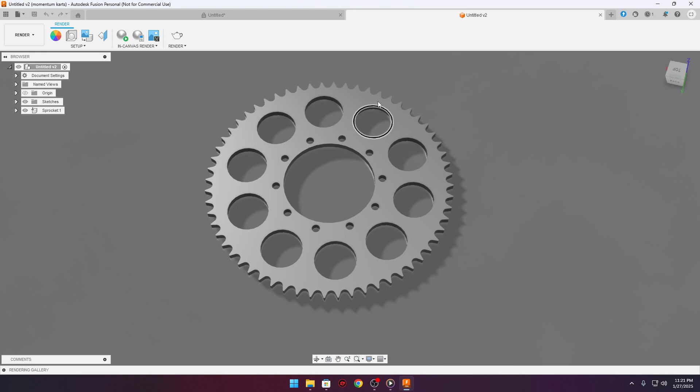What you're gonna need is Fusion 360. You can get this free from their website. And then you're gonna need the Sprocket Master add-on. I'll link this in the description. You can download it.

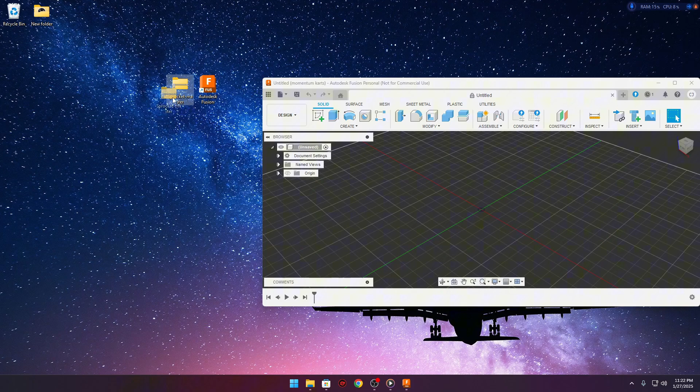You're gonna extract this. Once you extract it, you're gonna come to Fusion 360 and over to Utilities, and then go into Add-ins, Scripts and Add-ins. Then you're gonna push on this little green plus right here. When it opens up, you're gonna go extract that, go into the folder, and then click on the second one. You can see down here, My Scripts, and it shows Sprocket. You're gonna click on that and push Run.

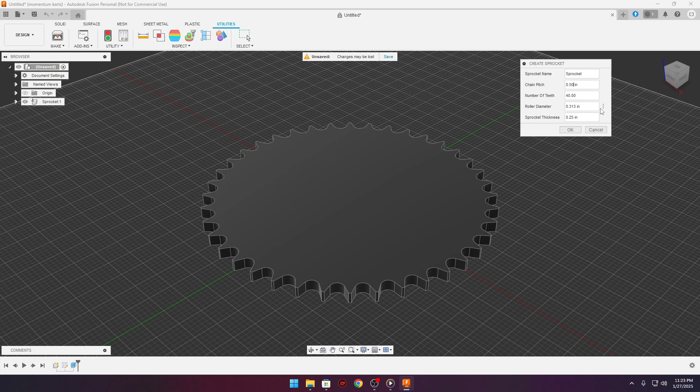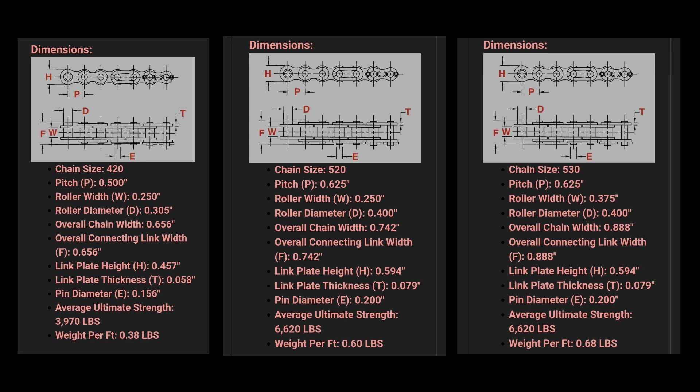So now you're gonna want to put in the dimensions of the sprocket. I'm gonna be running a 530 chain, so I put in 625 - that's the dimension, the pitch of a 530 chain. And then I'm putting the number of teeth. I'm gonna be building a 60 tooth.

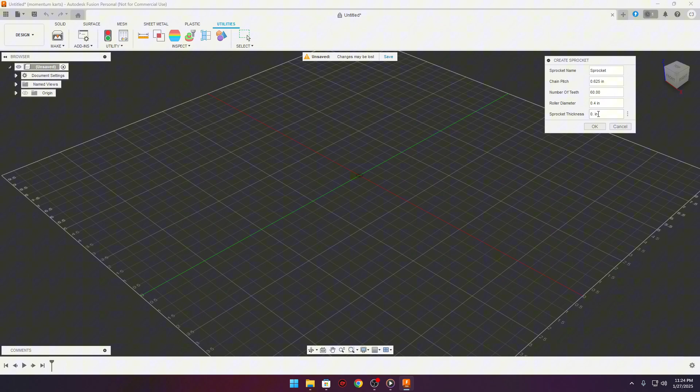And the roller diameter is gonna be 0.4. Sprocket thickness - we're gonna do it barely thinner than the chain is. We go with like 313, .313. Give this okay.

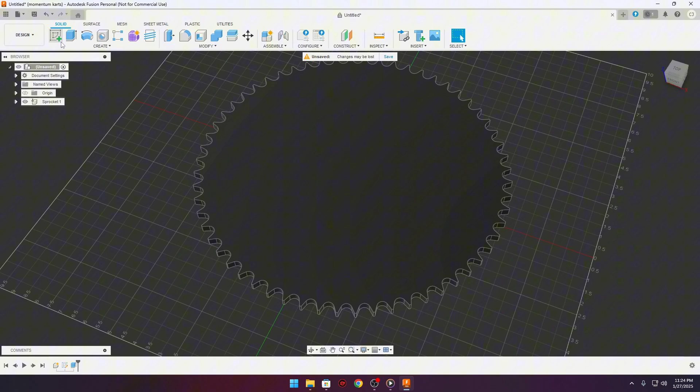So we go over to solid up here. We're gonna go to create sketch, and then select the face of the sprocket. You can add whatever holes you need. So let's just say I'm building this for one of my drive spools. We'd go around 130 millimeters - that's the bolt hole circle.

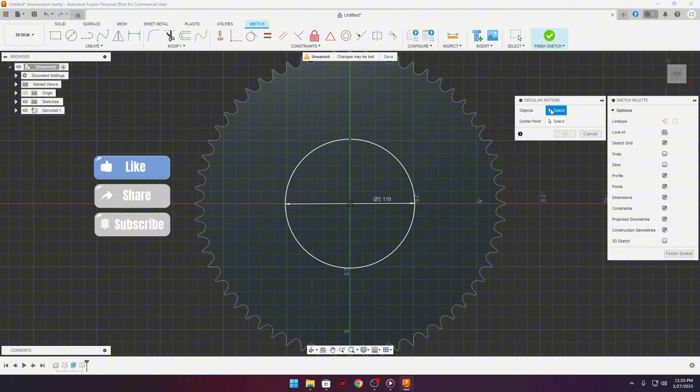You want to create a point right here. I'm going to create a point on this circle. Create again. Circular pattern, objects - this is where you want to select the point you already made. And then the center point is just the center. Then pick how many holes you want - I'm going to need 6.

Push OK. Make these whatever size - go with 3/8.

Now I'm just gonna make the center, say about 110 millimeters.

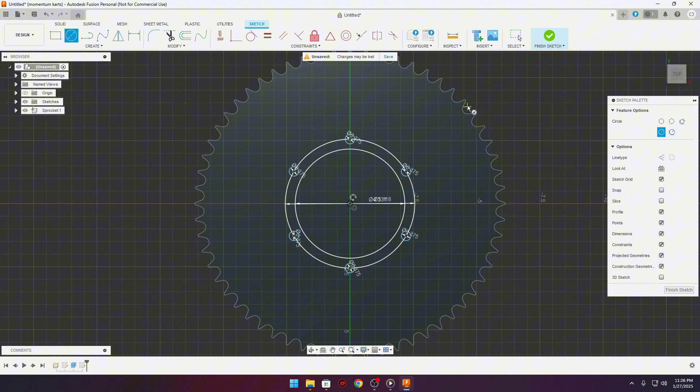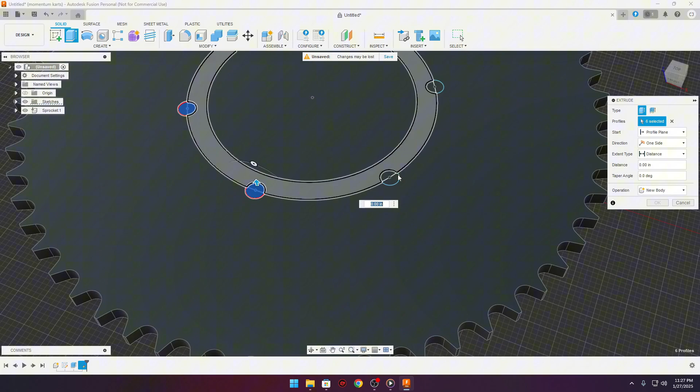And then we're gonna go up here to solid, top left hand corner. We're gonna go over to extrude. You can select all the holes, all the pieces you don't want. Just extrude that through the sprocket so it pops out of the sprocket.

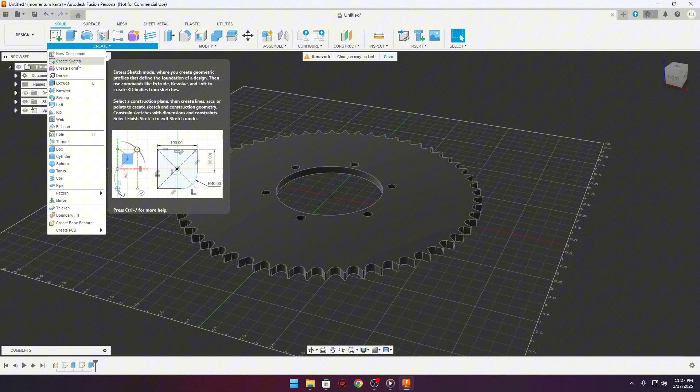Get another point. Circular pattern - select on the object, or select center point, and then select the center point, and stick in. Let's go with 8.

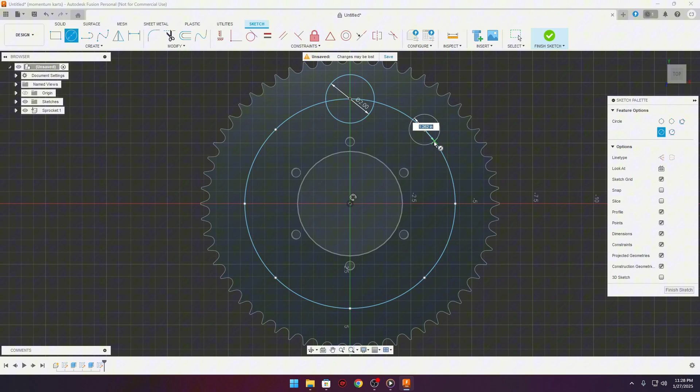I need that, can just pick a random size - let's go with 2 inches. We can extrude those.

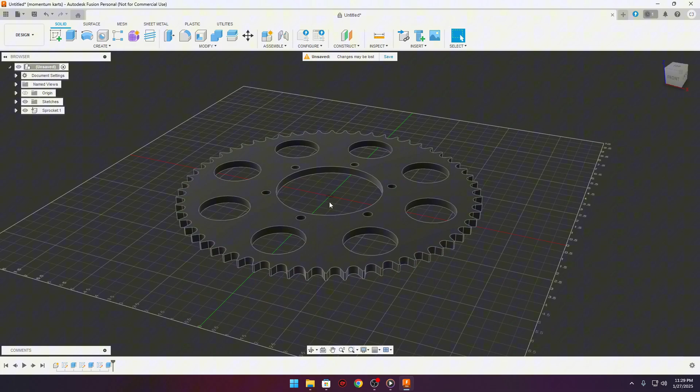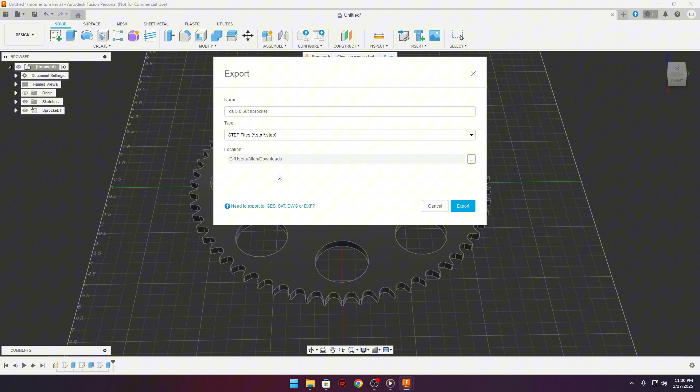And now we have the sprocket. Come down here to export. Export your design. You want to select step file. Export it - let's export complete so we can go out of this.

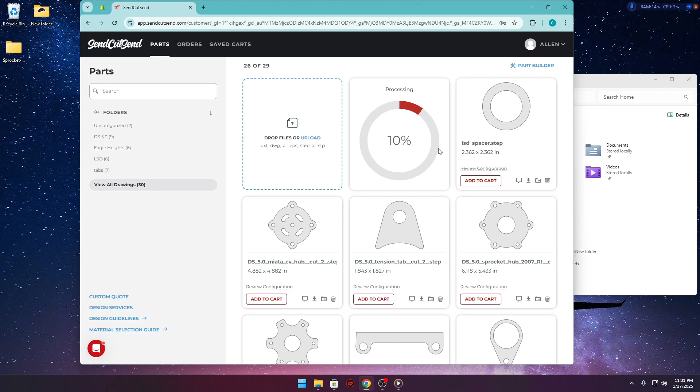Okay, now the thickness is what's going to matter a lot. This 520 chain, 530 chain is the exact same pitch. The only difference is the thickness of the sprocket. So when you select metals, we don't need anything fancy, we just need normal hot rolled steel.

And for 530 chain, you're going to want to select this .313 for the 8mm. You can see that's $84, but this sprocket's like more than a foot in diameter - it's a pretty big sprocket. If you see 2 of them, they're 53 each. The smaller one's going to cost a lot less, and if it's 520 chain, yeah, $75. This is a pretty big sprocket.

But yeah, it's just a super easy way to build a sprocket. I was looking around for a while, a lot of websites trying to find how to build a custom sprocket, and I came across this tool. It's just a free tool on GitHub. Works really nice.

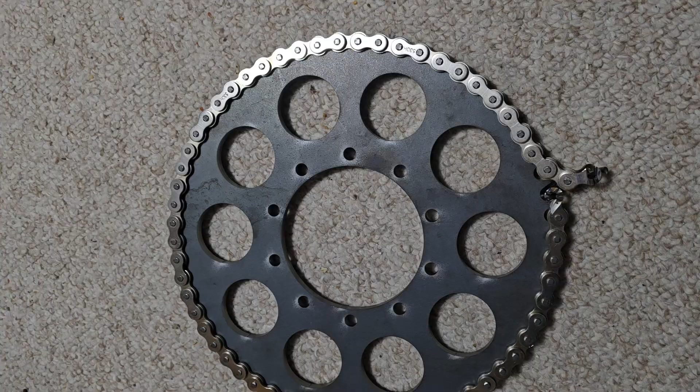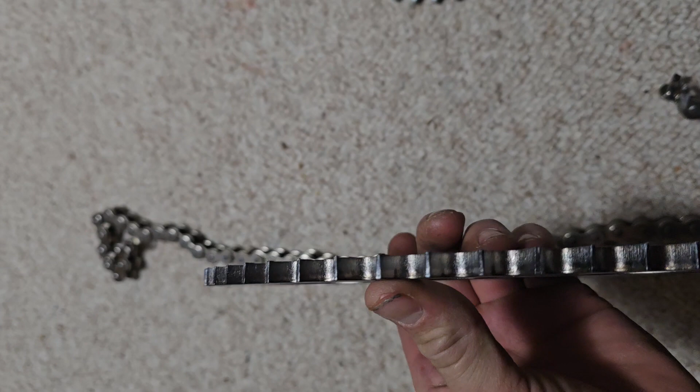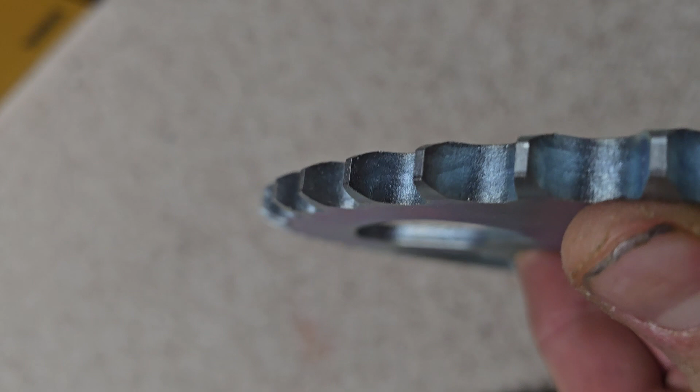So this is one of the sprockets that I custom designed. One thing you're gonna want to remember is to take this and make these teeth a little more pointy, with a grinder or something, go around. See on one I bought on eBay, the teeth are pointed a little. You just want to go around with a grinder and do that to all these teeth, or else your chain's gonna try to pop off and break your chain and stuff.